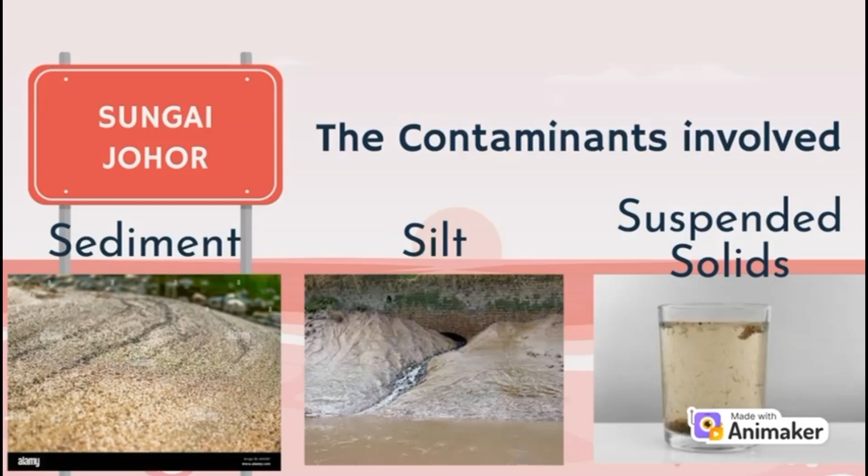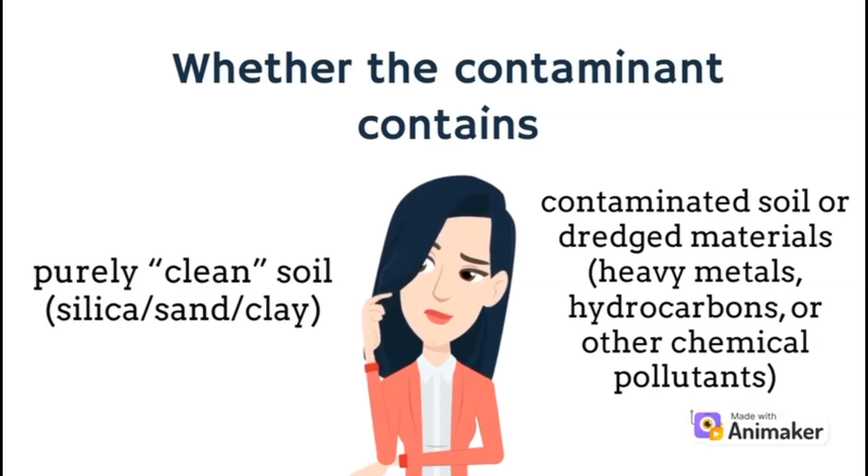But it still remains unclear whether the contaminant contains purely clean soil, such as silica, sand or clay, or contaminated soil or dredged materials that contain heavy metals, hydrocarbons, or others.

Next, the impact of the problem. First, water treatment plants were shut down because turbidity levels were too high to process. This affected the Sungai Johor, Linggiu, and Semangar water treatment plants. Next, large-scale water cuts occurred, affecting around 800,000 users. Areas impacted included Kota Tinggi, Johor Bahru, Kulai, and Pontian.

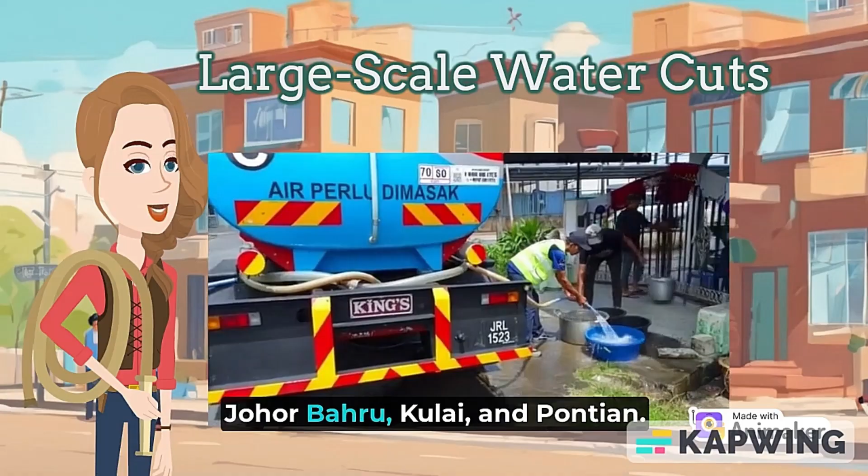Finally, the pollution caused economic losses. Fishermen lost their income, and water-dependent small businesses were unable to operate. The lack of clean water can create a public health emergency. Communities may face disease outbreaks, and hospitals could become overloaded as more people get sick.

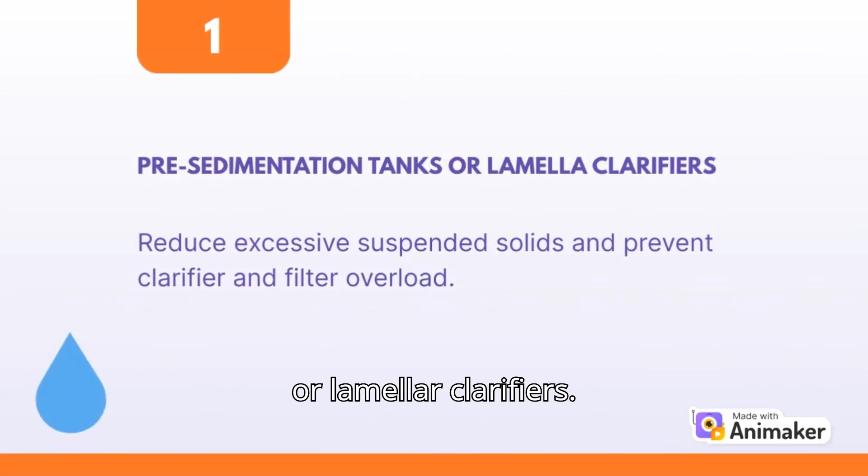What should we do when turbidity reaches 37,400 NTU? These are some of the emergency countermeasures for high turbidity events. We will explore 3 essential techniques designed to reduce suspended solids and prevent water treatment plant shutdowns. Firstly, pre-sedimentation tanks or lamella clarifiers. The objective is to reduce excessive suspended solids and prevent process overload.

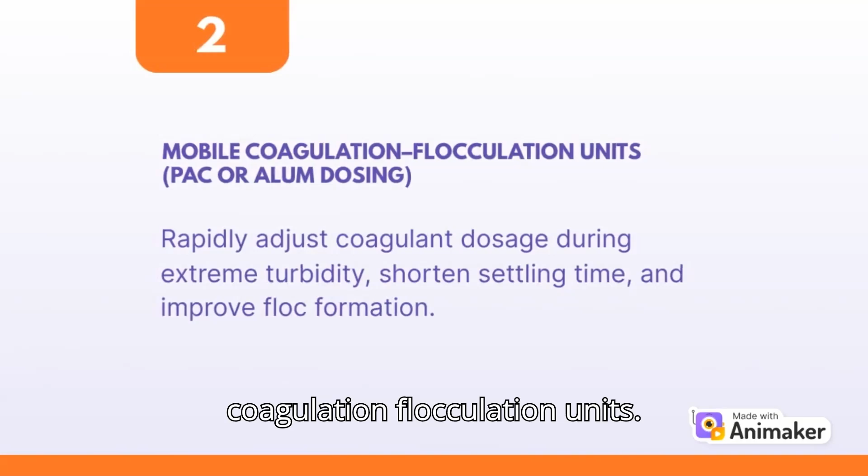Secondly, deploying mobile coagulation flocculation units. By rapidly adjusting coagulant dosage during extreme turbidity, these units shorten floc settling time and stabilize treatment performance.

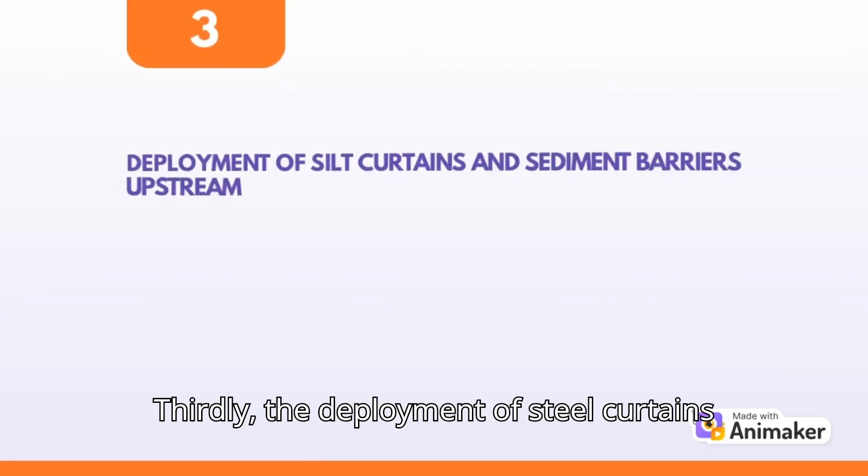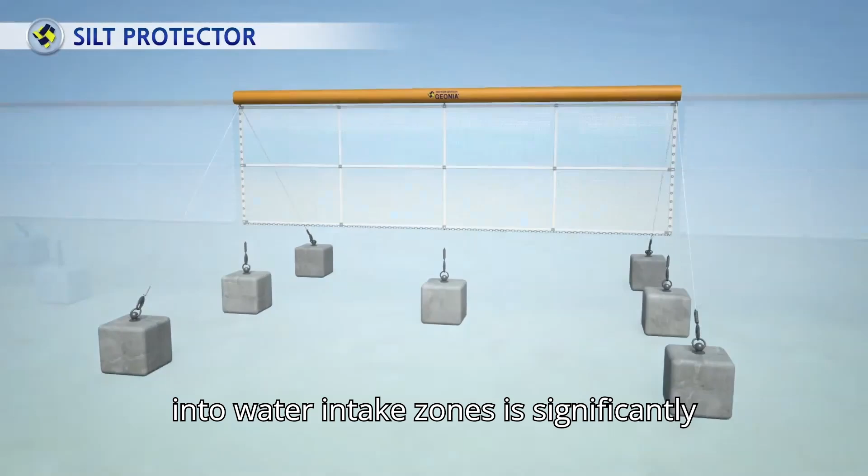Thirdly, the deployment of silt curtains and sediment barriers upstream. By physically containing suspended solids near pollution sources, sediment inflow into water intake zones is significantly reduced. These barriers act as a first line of defense, limiting the downstream transport of fine particles during high flow events. As a result, raw water quality at the treatment plant is protected.

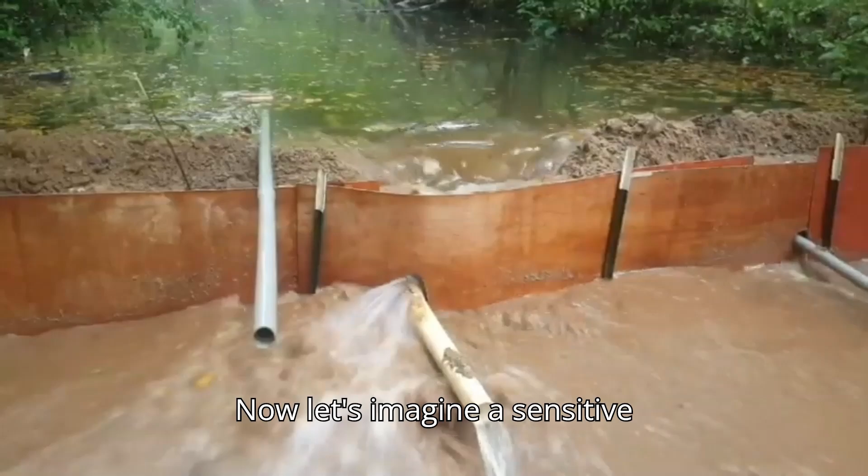Let's imagine a sensitive silt pond with very weak structural integrity, gradually deteriorating under fast-flowing water. Over time, the structure fails, releasing large volumes of suspended solids into the river. Therefore, let us explore how geotextile reinforced embankments can improve silt pond performance. Turbidity in silt ponds often results from embankment slope failures. These failures release sediment suddenly, causing severe water cloudiness.

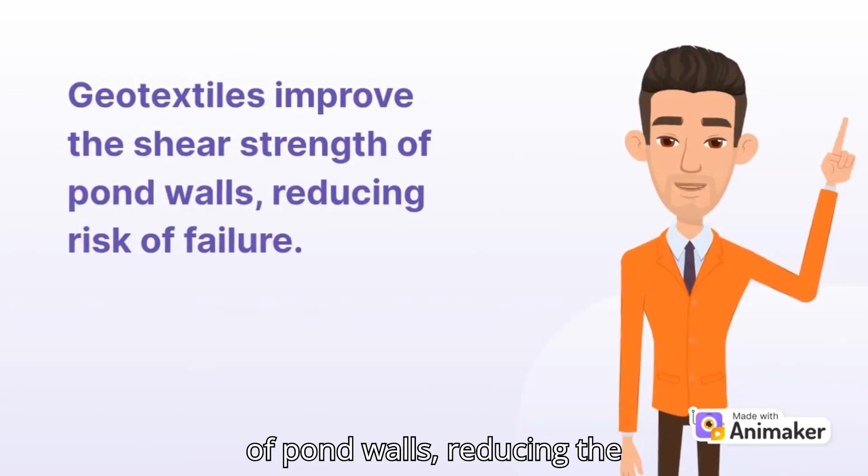By installing woven or non-woven geotextiles within pond embankments, slope stability can be significantly enhanced. Geotextiles increase the shear strength of pond walls, reducing the risk of structural failure. This structural stabilization prevents sudden sediment release, greatly reducing turbidity within the pond water.

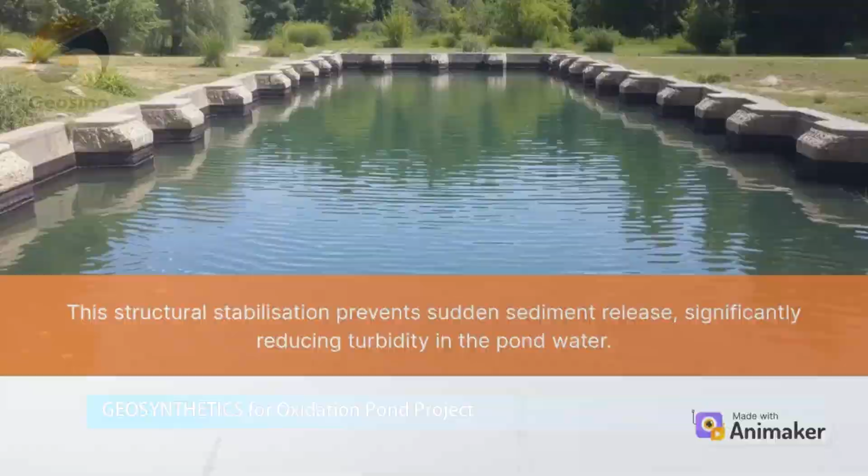Here, we can see how geotextiles are installed within the embankment layers, reinforcing the soil structure and ensuring long-term pond stability under high flow conditions.

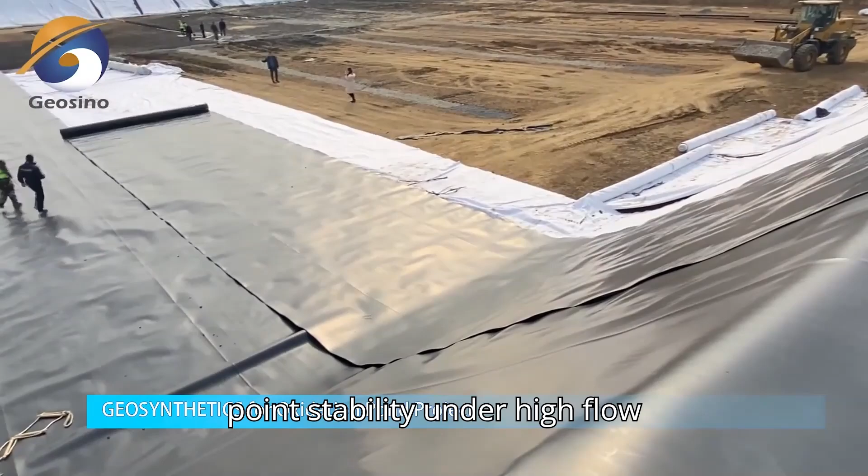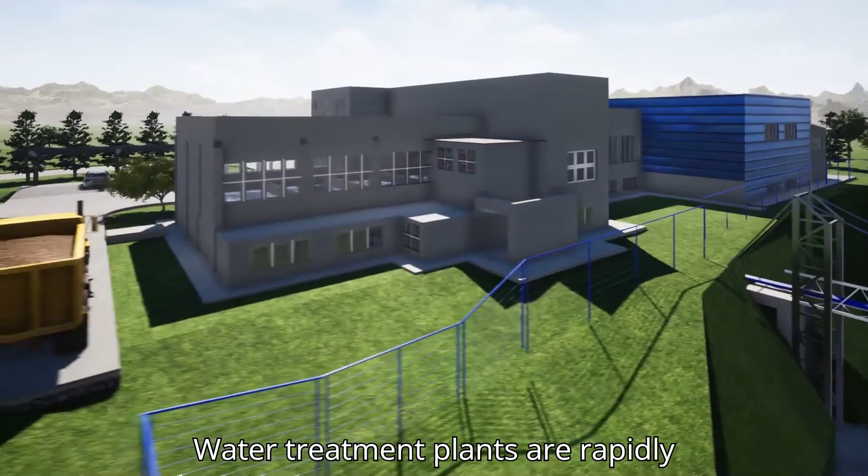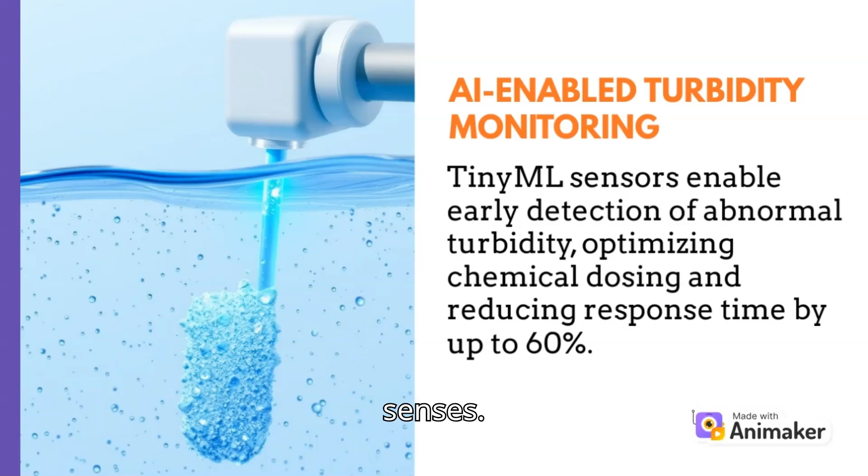Next, we move on to innovations in water treatment plant design. Water treatment plants are rapidly evolving, incorporating smarter technologies to handle significantly higher turbidity loads. The first innovation is AI-enabled turbidity monitoring, such as TinyML sensors. TinyML sensors enable early detection of abnormal turbidity, optimizing chemical dosing, and reducing response time by up to 60%.

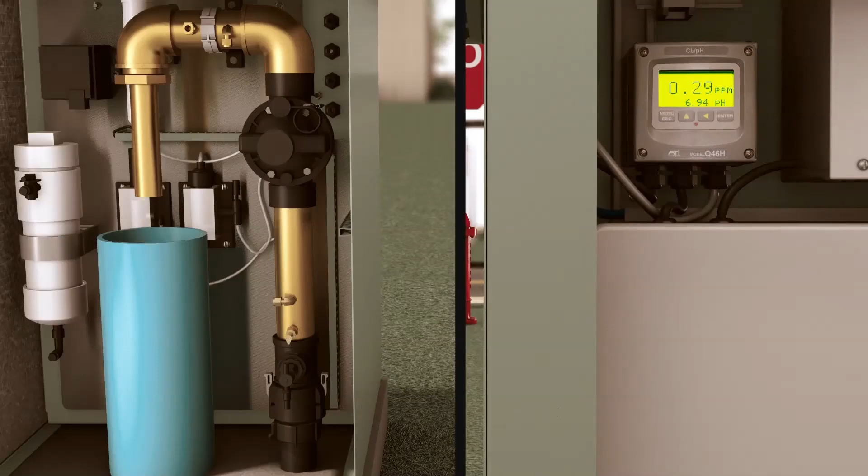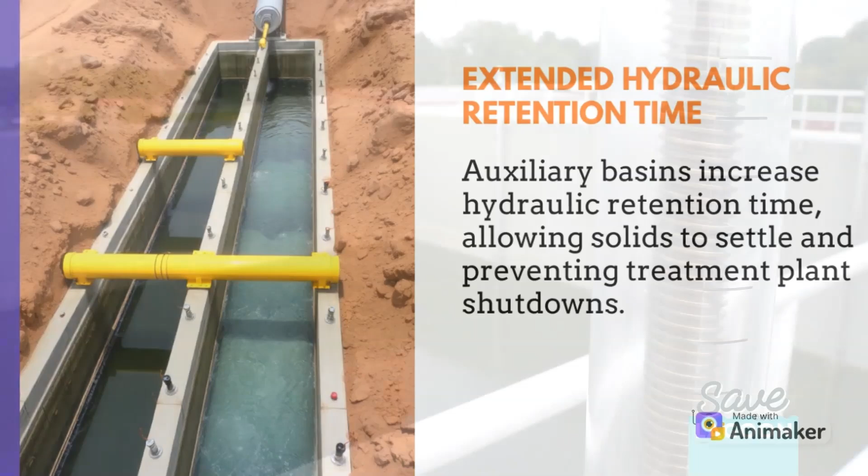The second innovation is extended hydraulic retention time. Auxiliary basins increase hydraulic retention time, allowing more solids to settle and preventing treatment plant shutdowns.

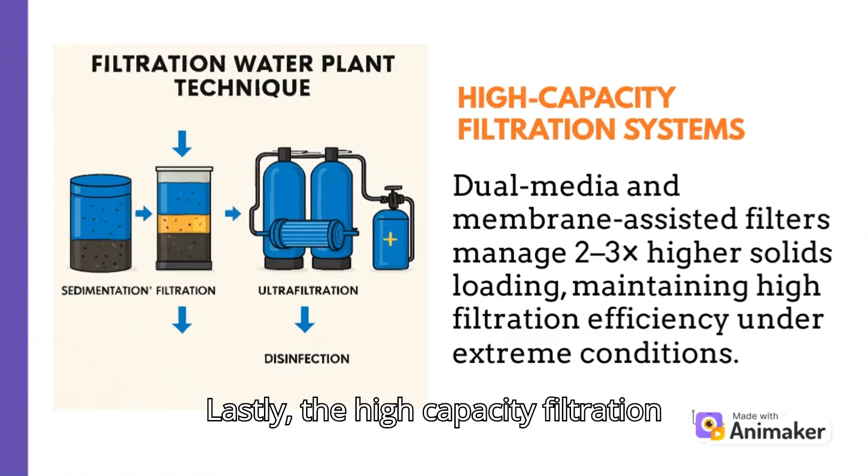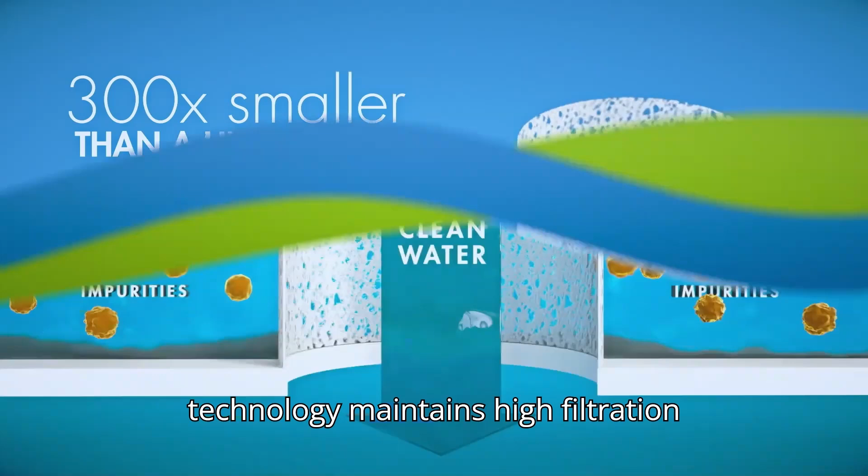Lastly, high-capacity filtration systems compared to conventional sand filtration. Dual media and membrane-assisted filters manage 2 to 3 times higher solids loading, with up to 10,000 hollow fibers, each hundreds of times thinner than a human hair. This technology maintains high filtration efficiency, ensuring clean water even during extreme turbidity events.

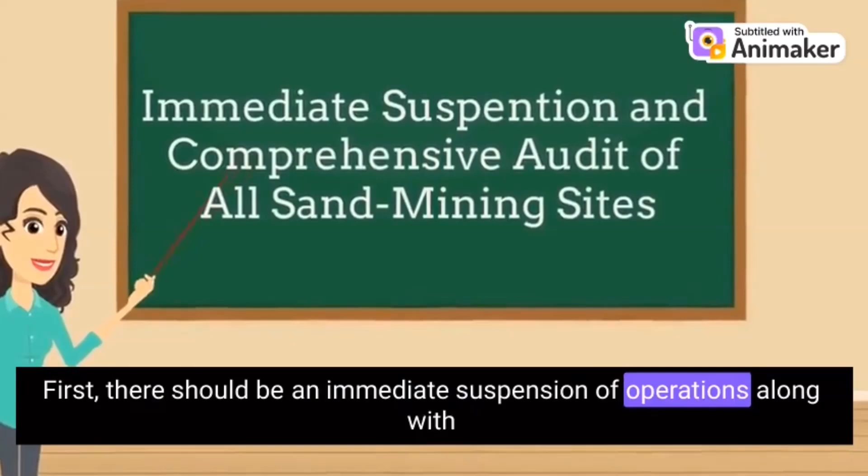So here, we're looking at the preventive measures that can help reduce the risks caused by sand mining. First, there should be an immediate suspension of operations, along with a full audit of all sand mining sites. This is important because stopping work right away helps prevent further damage and gives authorities time to identify problems and fix them before operations continue.

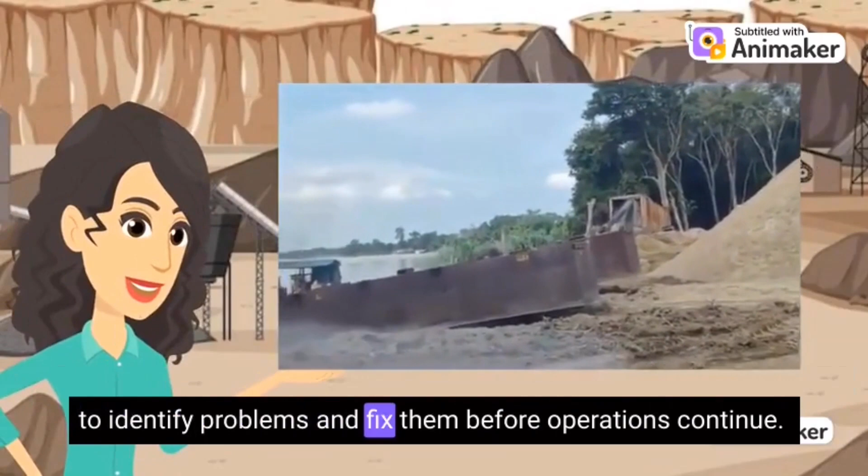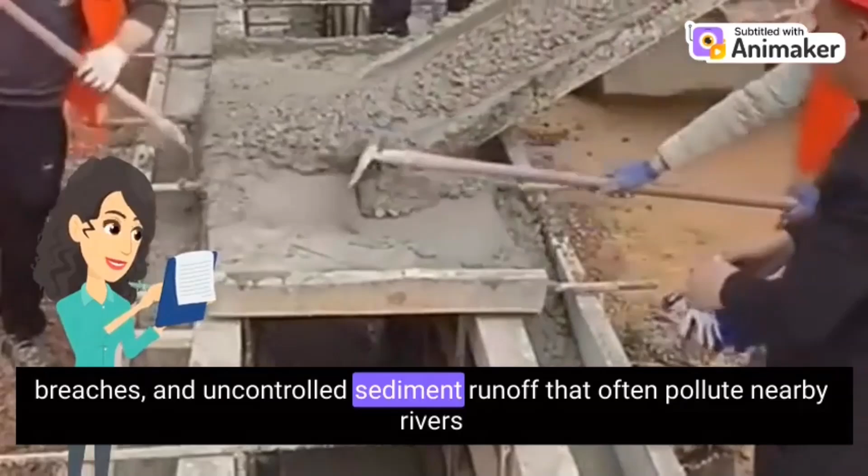Next, we need mandatory upgrades to silt ponds and drainage systems. By strengthening these structures, we can prevent overflows, breaches, and uncontrolled sediment runoff that often pollute nearby rivers and waterways. You can help protect Sungai Johor, reduce waste, prevent pollution, and support clean water initiatives. Together, we protect our river and our future.